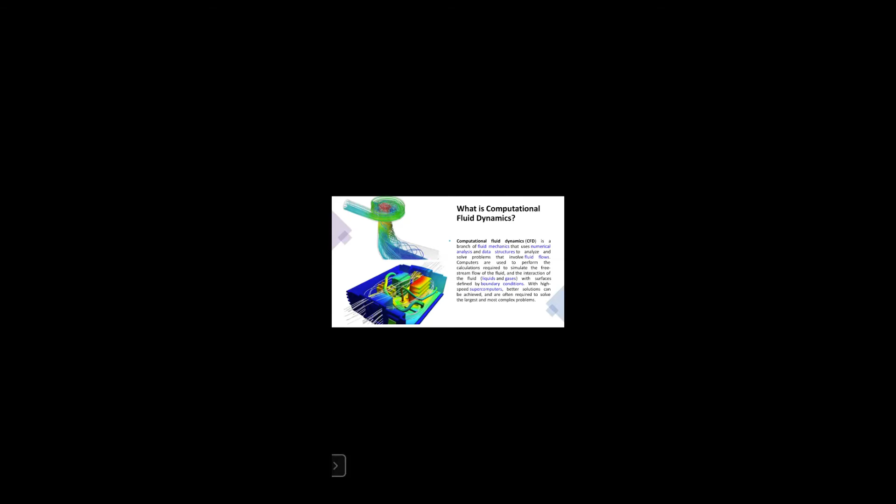Coming to the conventional definition, computational fluid dynamics is nothing but a branch of fluid mechanics where we study the fluid flow with the help of boundary conditions and supercomputers for better solutions and accurate results.

Coming to the applications, we have seen many industries using this tool, where there's the ease of maintaining room temperature in data servers. So we design data cooling rooms in order to prevent the heat produced, and also account for weather temperature feasibility. In the days of the COVID-19 situation, reducing the flow of infections was a major problem, so HVAC and CFD played a major role in maintaining corporate offices and other things.

We also use CFD in automobile and aerospace fields, where design and drafting take place. I'm currently working in the aerospace domain, where there is lots of research scope, because the Indian government has introduced privatization in the aerospace industry, so there is lots of scope, not only in India but also abroad.

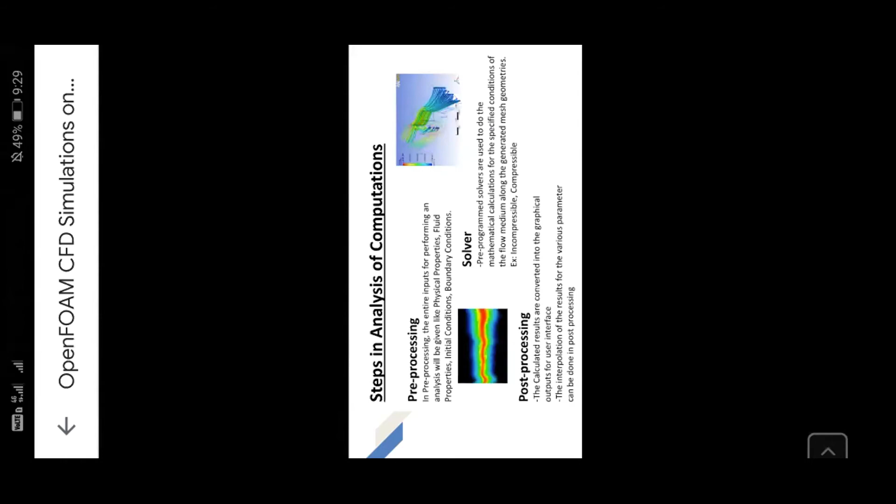We provide the input, such as the initial conditions, the type of fluid flowing through, and other parameters, when we input a fluid inside a solid workspace.

So the solver takes all your input data and all the constants. By default there are many equations and solutions already present, where the computation takes place using this cloud computing concept. Some amazing things are done by these Power9 systems, so that we can get results very easily and very fast.

In post-processing, we obtain a graphical output for the user interface, where interpolation of results for various parameters takes place. Post-processing is all about analyzing the results into real-time mechanical results, which we calculate using MATLAB and other tools such as Fortran and so on.

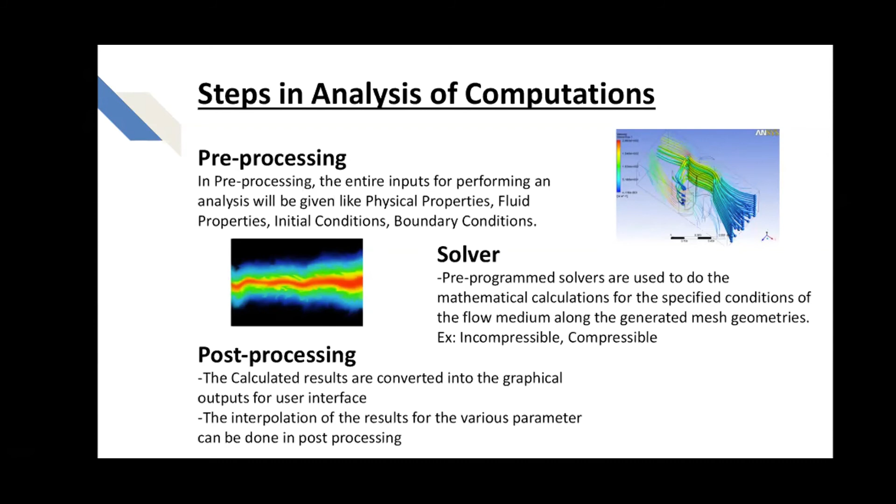The main aim of my research work was fluid flow in an aerospace aircraft. Actually, it's a confidential project, so I just took a part of it and I'm explaining that to you.

This is the OpenFOAM input pre-processing screen, where we input parameters such as the fluid type, the fluid gradient, the inlet velocity, and the pressure of inlet, and other parameters such as the starting time, the end time, and at what time you need to obtain the result, showing the characteristic of the fluid.

At each and every point and coordinate you get the data, every second or minute if needed. That is the beauty of this software called OpenFOAM, as anyone in this world can use it since it is an open source tool.

But the problem with this is we need to code the stuff. As I told you, we don't have boundaries or boundary conditions and other things set automatically, so it is not easy to perform our computations.

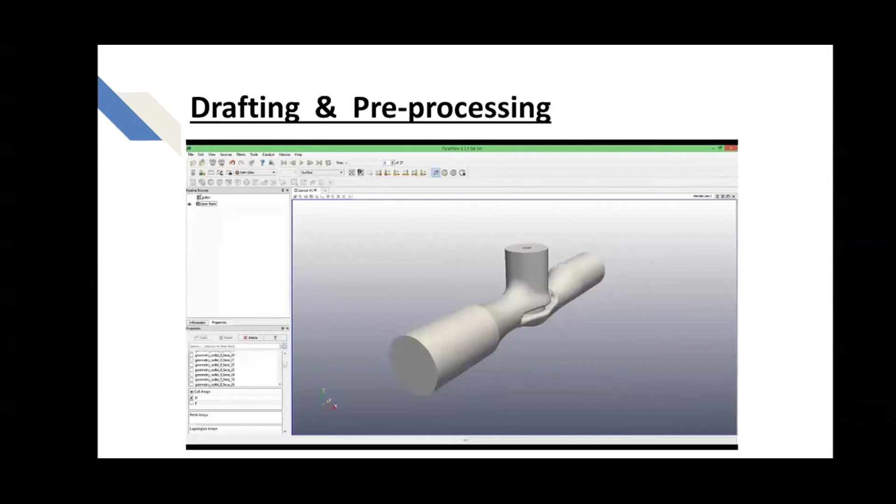This is the CAD design which we input in our pre-processing, and we go for the meshing. What meshing basically means is we divide the computer aided design into billions of parts, wherever we need accurate results. Hence we divide the model into billions of parts, where we integrate and get the result.

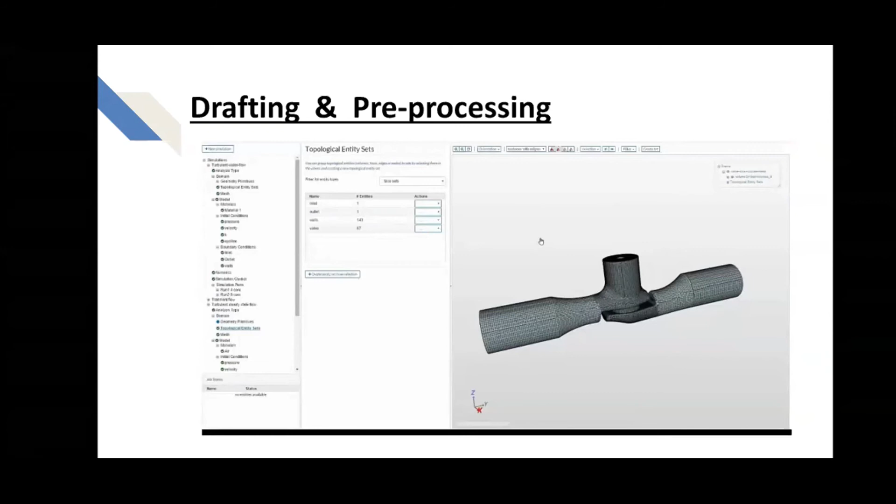And this is the solver. This is the place where all the computations take place.

And this is the user interface called ParaView, where all the simulations and computations are visible to your eyes using the Power9 GPU processors. So this is ParaView, where the results are obtained.

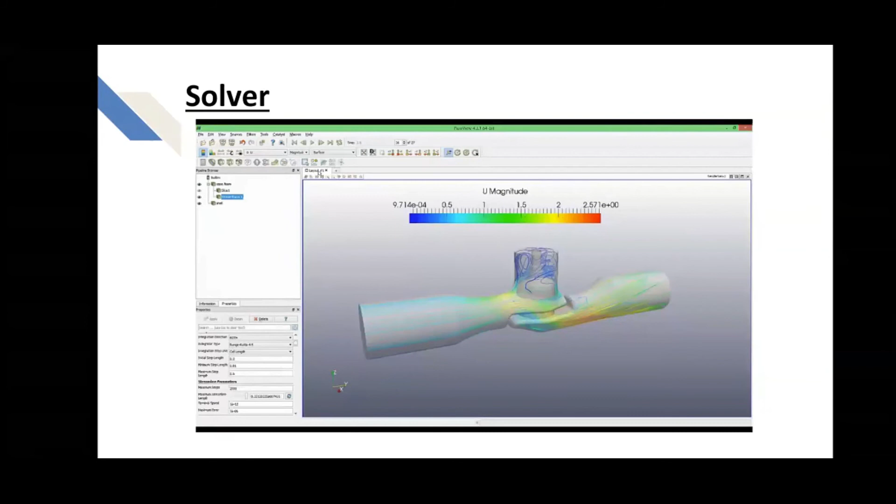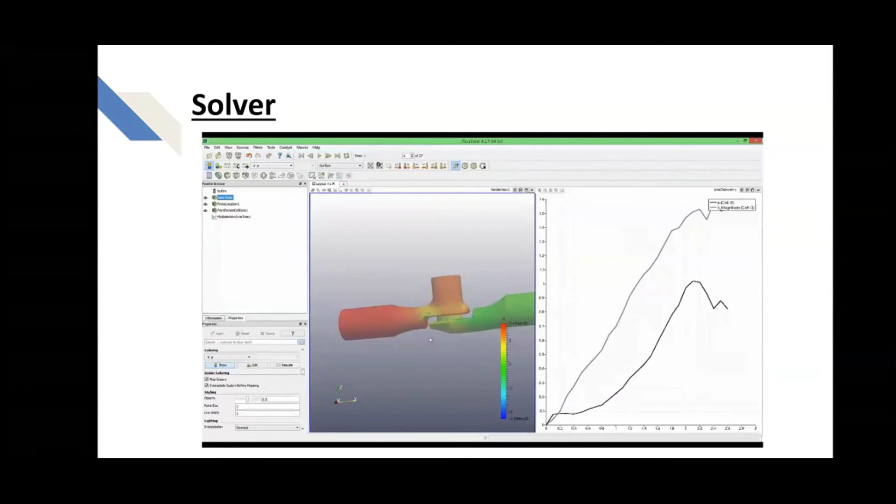This is the post-processing, where your graphs and other results come into picture, and you can tally them with your real-time experimental data from the machine.

So here is the post-processing screen of OpenFOAM, where you can see the time, and at what time what is the behavior of the fluid flow. You can see on the screen that at the point of 41.8 seconds, these are the constraints of the fluid, and at what time, at what place, at what coordinate the fluid is located.

So it's the beauty of the technology, my friends.

Anything, what I believe is, after starting my career, the problem statement has to be very clear. With the advancement of technology and computations, any problem can be solved, but our problem statement has to be very clear.

So these are the results at the time of the 75th second, the coordinates, the fluid flow, the temperature, and all those constants are visible here.

Apart from our computation and research, myself and Ganesan Narayanasamy sir, who is the OpenPOWER leader for education and research, have created an ecosystem in India so that people take interest in these kinds of technologies.

So what is the future now? We have done all the research and all the things, but how can it benefit our society?

Our future plans are to encourage startups in terms of education and research, and also our aim is to create an ecosystem where artificial intelligence and machine learning takes place in terms of CFD, where there is a huge amount of data, and previous data and models can be treated, and other things can be done.